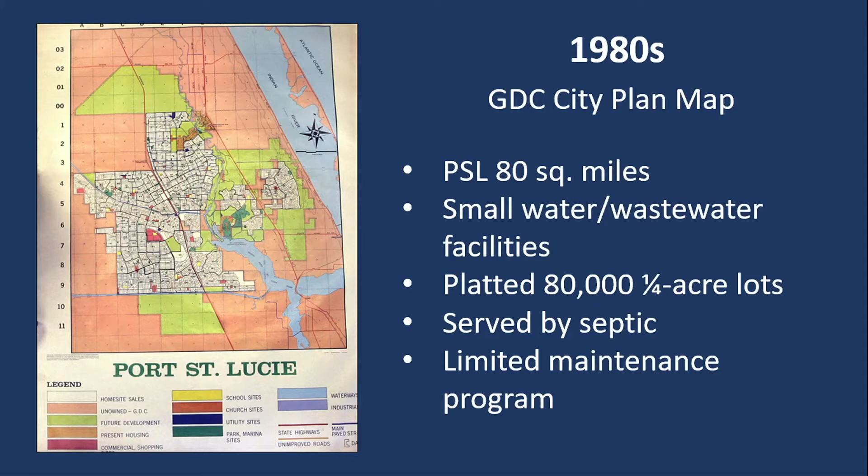So there could be as many as 4 septic systems on 1 acre of property, with a very limited maintenance program. Fast forward to 1990, GDC and GDU filed for bankruptcy. They couldn't handle the growth or the demand. Back to that infrastructure, they would sell a lot, build the house, hook it up to a well and a septic system, only in a couple spots did they actually put infrastructure into the ground.

New developments nowadays put all that infrastructure in first and then build the community on top of it, but GDC didn't really do that. They couldn't handle the demand, so St. Lucie County acquired the utility through the quick take legal process, and wouldn't you know it, they struggled with it as well. In 1992, they ran out of water. On a Sunday, citizens used 1.2 million gallons of water in just 4 hours.

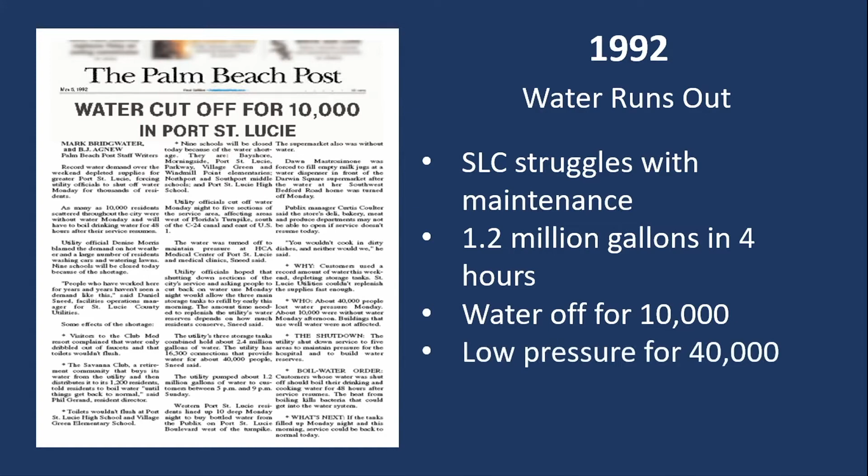That's a tremendous amount of water. On Monday morning, can you imagine waking up? Mondays are bad enough, but then you wake up with no water. 10,000 customers had no water, and 40,000 people had very low pressure. It was a tough go, and it definitely made some headlines that day.

But Port St. Lucie was so excited and determined to expand the infrastructure. When we acquired the utility, we had 17,000 water customers and 10,000 sewer customers. We had seen the difficulties GDC experienced, and the difficulties St. Lucie County experienced, so we wanted to expand that system, particularly all of those septic systems that were taking up so much space. We wanted to really expand that sewer system and get that infrastructure updated.

Fast forward to 2012, doing very well.

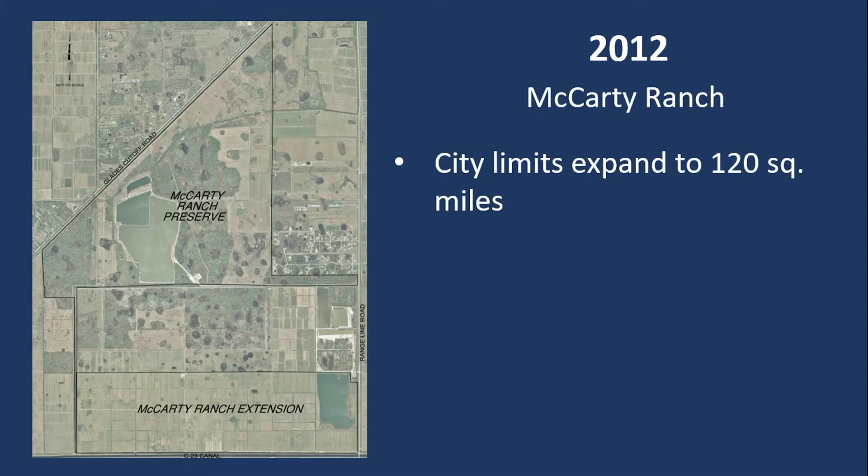The city has expanded from 80 square miles in 1980 to 120 square miles. We purchased this McCarty Ranch property. If anybody's been there, there's a tremendous amount of recreational activities, but the reason we purchased that property, and you'll see on the map, are those large lakes.

This is the site of a proposed future surface water treatment plant. Because our growth has expanded so far out west, we have two water treatment plants currently, but we need to prepare for that growth out west. Even back then, we knew this city's growing, it's expanding. We need to have a third water treatment plant to service those folks out west. So that's what that property was purchased for.

And then down at the bottom, you see we also have McCarty Ranch Extension, and that is the home of our water quality project, and I'll get into that in a couple more slides. But at this point in 2012, a lot of growth there, 71,000 water customers, 52,000 sewer customers.

Our utility is a self-permitting utility. We're only one of 4 in the entire state of Florida that has that. So what that means is we're really a one-stop shop. When businesses, new construction's taking place, you don't have to go to West Palm, to DEP, the Department of Environmental Protection, to get those permits. We can issue them here, right here in Port St. Lucie. So that's really a great honor for us.

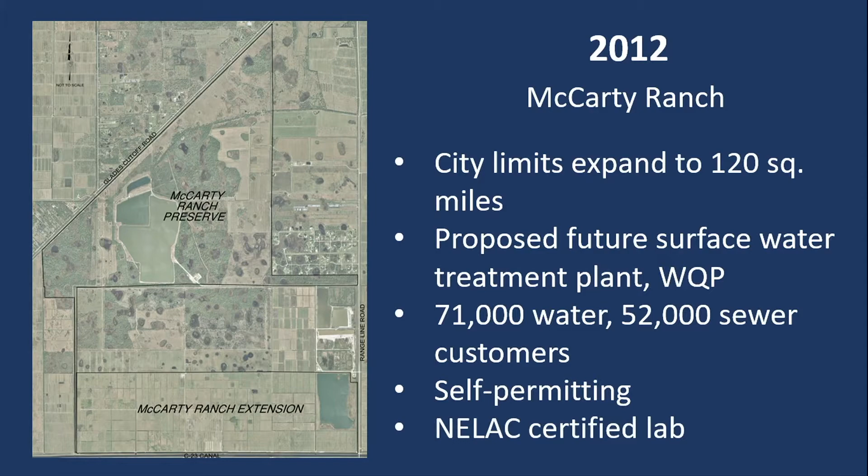We also have a nationally accredited certified lab that's housed in one of our water treatment plants. So that just means we can do a lot of our testing in-house. Nothing really has to be sent out, so that's super efficient.

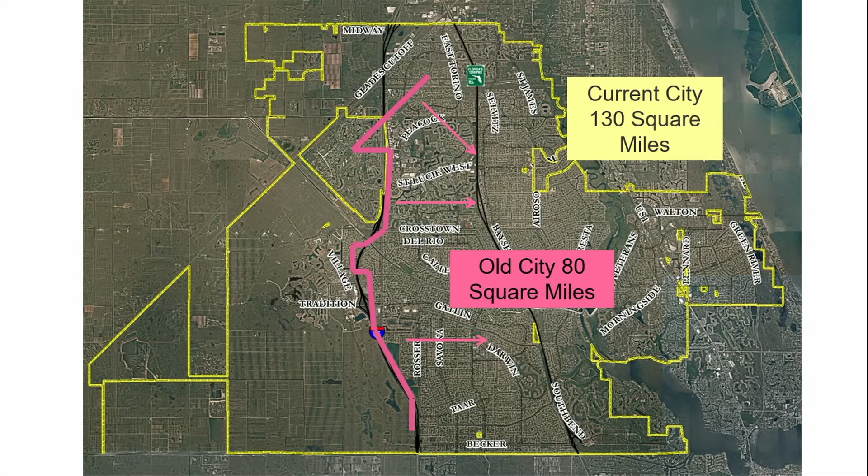So about 9,000 septic systems are out of commission. They're not working anymore. They have failed. Once they fail, you have to hook up to city sewer. And then, all of the new building and new construction that's taken place since then, we've kept 25,000 new septic systems from being in service, right? Because anything new construction-wise, it has to hook up to city sewer.

All right, so we have a tremendous amount of infrastructure, but a lot of it is actually underground, right? So when I first started working for utility systems, I kind of didn't realize. I thought I just turned the faucet on and out the water came. I didn't really give much thought to where it actually came from.

But just to give you an idea of just how much stuff we have, almost 5,800 fire hydrants throughout the city. I mean, you know how important fire hydrants are. We work really closely with the St. Lucie County Fire Department. We maintain all of those hydrants. We exercise them. We make sure that they're working properly because if there is a fire and the fire department rolls up, they want to make sure that they can get water out of that hydrant. So that's a really important part of what we do.

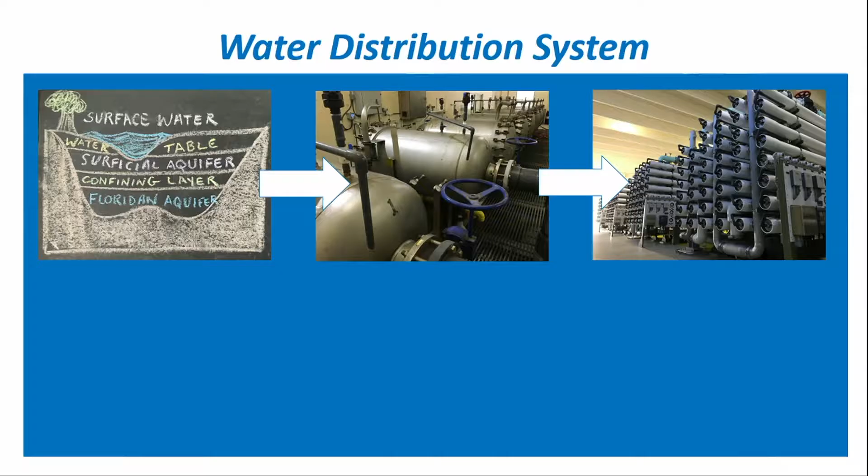Next, when you suck that water up out of the ground, it goes through the different filters. Sometimes there's kind of a sulfur smell, like a rotten egg smell, so it has to go through this next process, which is a degasifier, and that just strips that odor out.

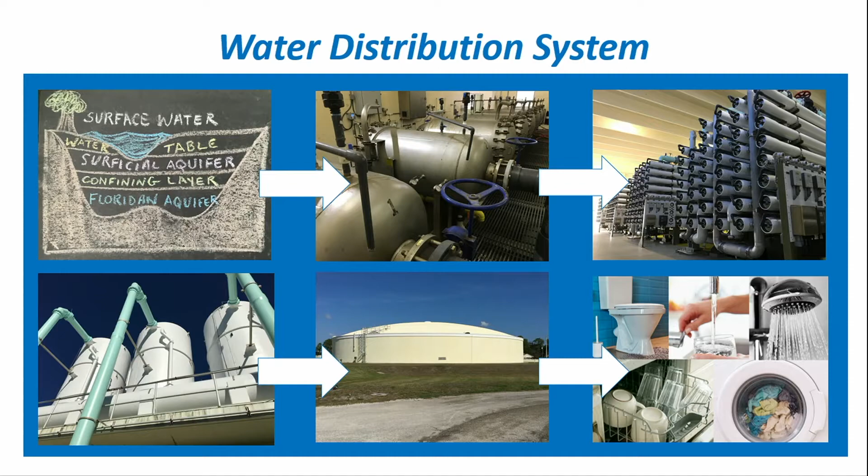And then all of that water is stored. We have storage tanks all over the city of Port St. Lucie. So when you turn your faucet on, that water goes from that storage tank through that 1,200 miles of distribution system, and then it comes to your house. That same treated water that comes out of your faucet is the same treated water that fills up your toilet, washes your clothes, that you shower with, that you wash the dishes with.

All right, so here's that quick video really getting into a deeper look at the water treatment process.

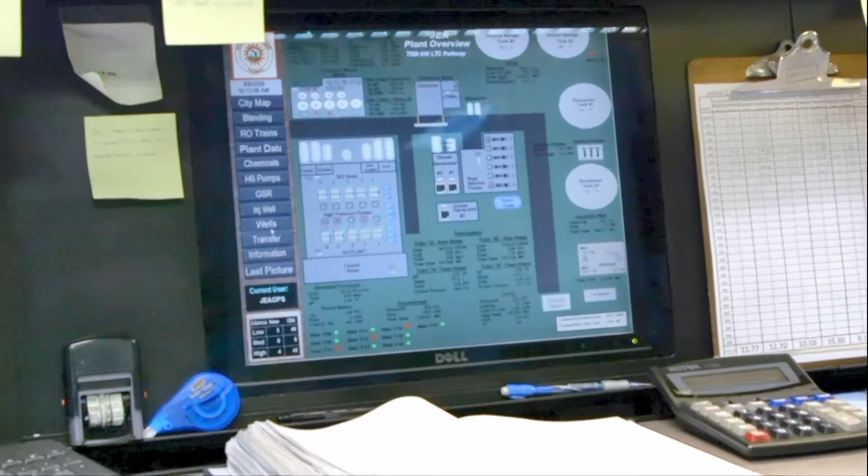Hello everyone, my name is Michael Poveromo, and we're here at the James E. Anderson Water Plant, and right now we're in the control room. Here is our system SCADA. Through these 3 screens we can see everything that's happening in the plant. We control one repump station out at Rangeline, and we can see everything going on remotely there. Everything here, pH, chlorine, pressure, flow, pretty much every little thing you can monitor, we monitor in real time.

Next I'll show you the process area. We have the process area, the blend basin, and some chemical rooms, and I'll take you out there in a little bit.

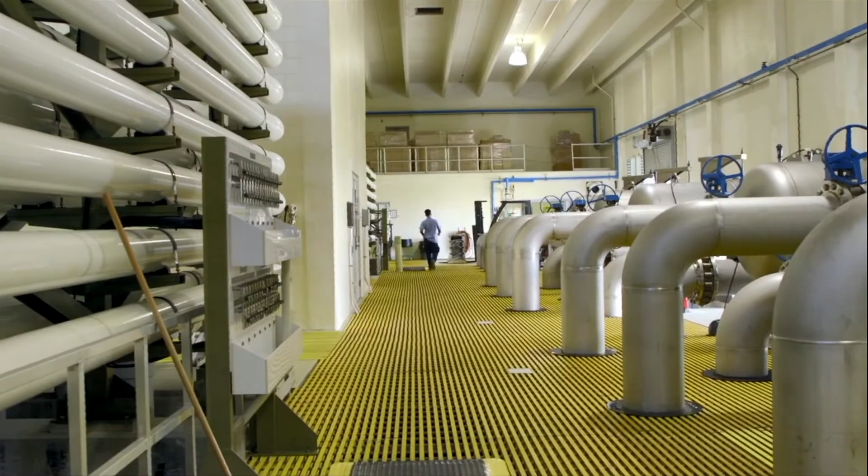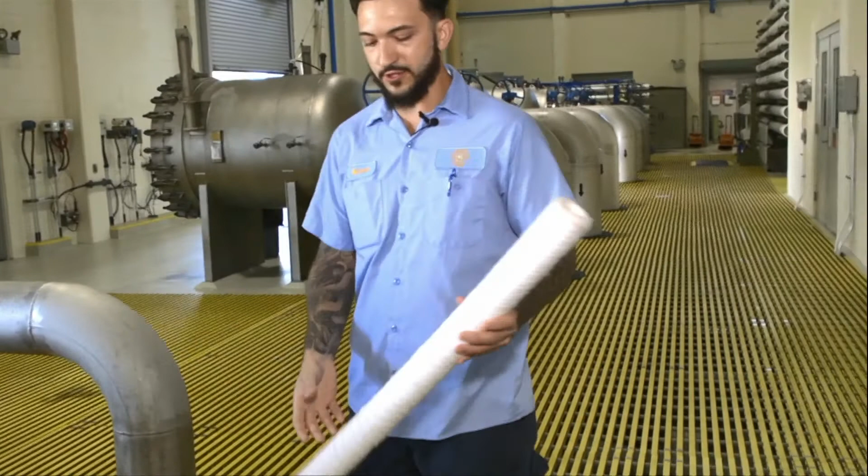Alright, here we are in the process area. Behind me you'll see the micron canisters. Those feed the skids, these are the blend micron canisters. The water coming into the plant, first we put it through the canisters behind me. Inside those canisters are about 200 filters that look like this, made out of yarn. It helps take out the sand and the silt before that water goes into the skids.

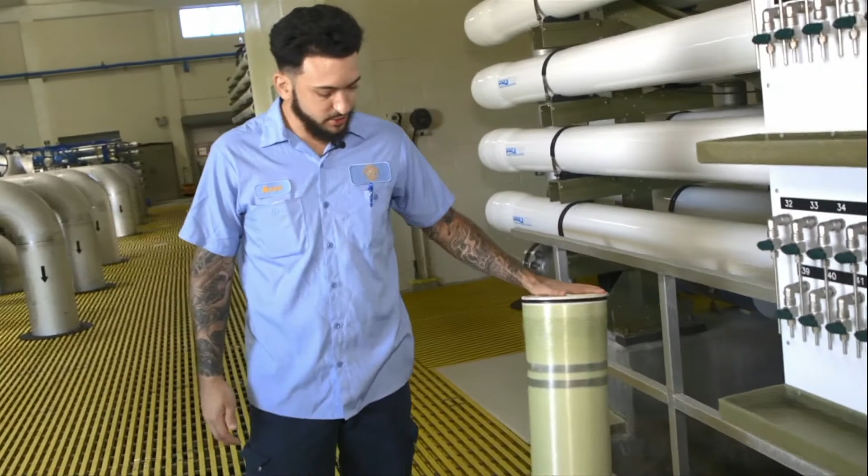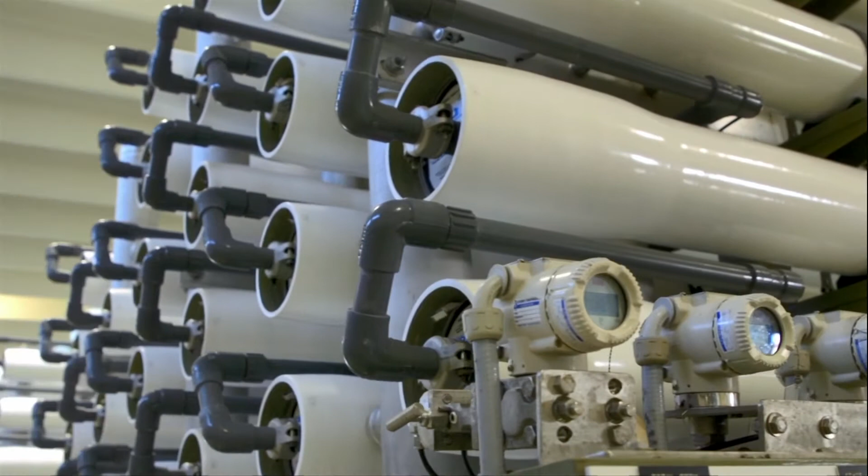We have 10 skids, each produces about 2 million gallons a day. We supply the water into these, we push it through membranes. These membranes are our reverse osmosis membranes. We have to supply a lot of pressure to get the rest of the total dissolved solids out of the water. We can't put raw water straight into these membranes because you'll clog them up pretty quick. So we pre-filter it with those, then it gets put into the skids with this.

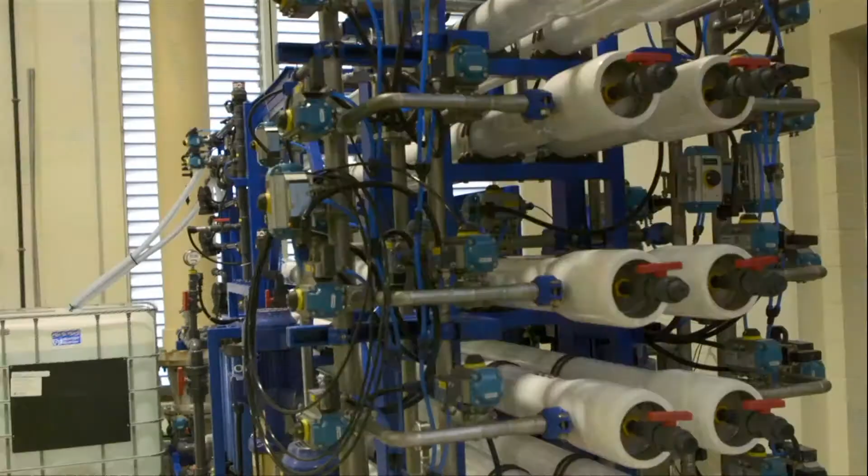Now this removes a lot of the total dissolved solids in the water. It removes so much that we actually have to blend water back into it to add mineral content back into the water, which is what these 3 smaller micron canisters are for.

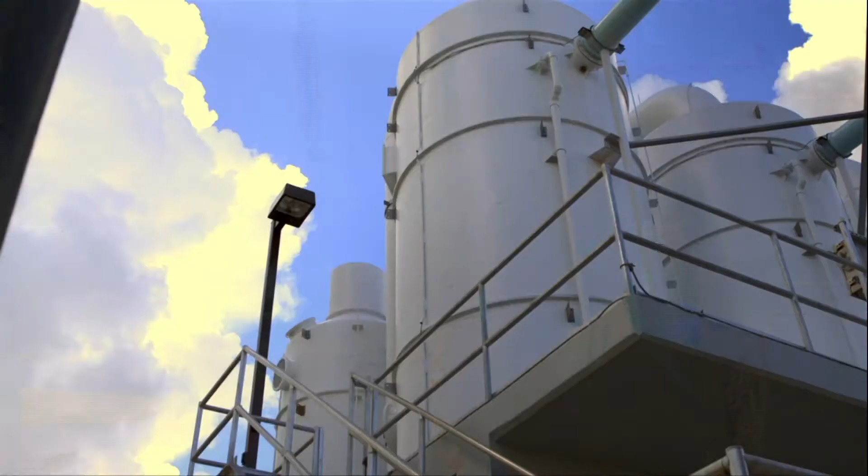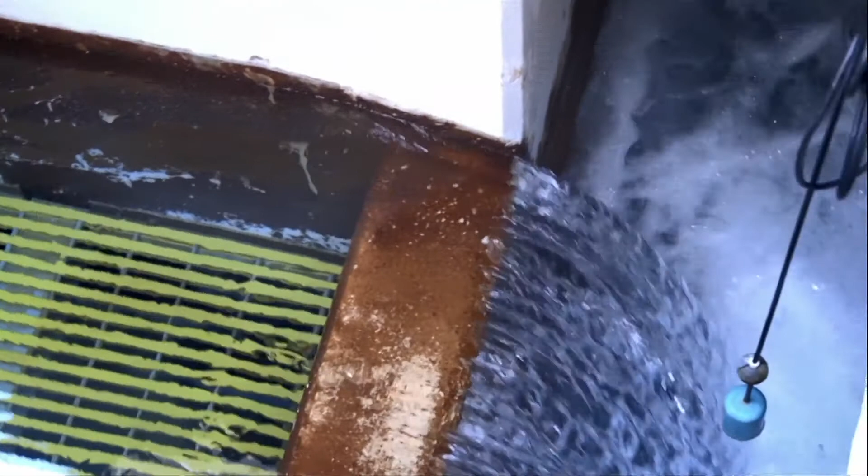Now we're out here by the blend basin, and you can see the stacks behind me. The first row of stacks are degasifiers. What we do is basically have the water falling down into troughs, kind of spread the water around to create more surface area, have the blowers pump air up, and it's air stripping. It'll take the rotten egg smell out, and then after that the water falls down into the blend basin.

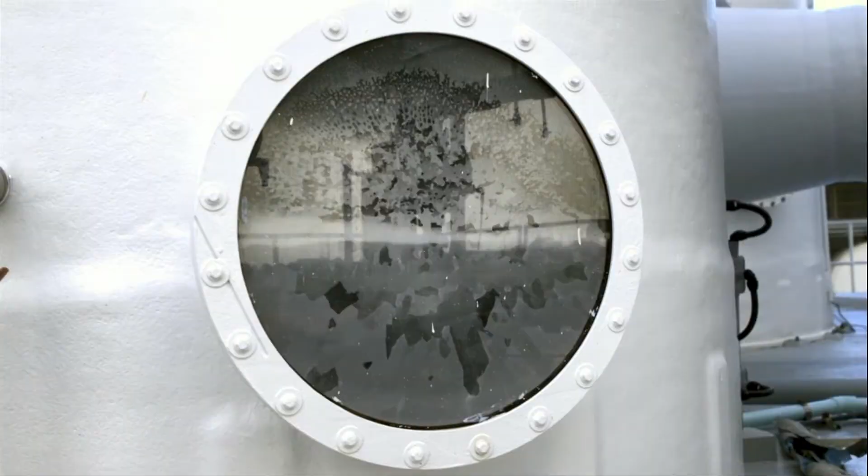It goes through channels. Now we're out by the back of the blend basin. As you can see behind me, the blue pipes are our transfer pumps. After all the chemicals and water have time to mix and disinfect, the transfer pumps will pump out the water into our ground storage tanks. We have 2 ground storage tanks on site, each one is 4 million gallons.

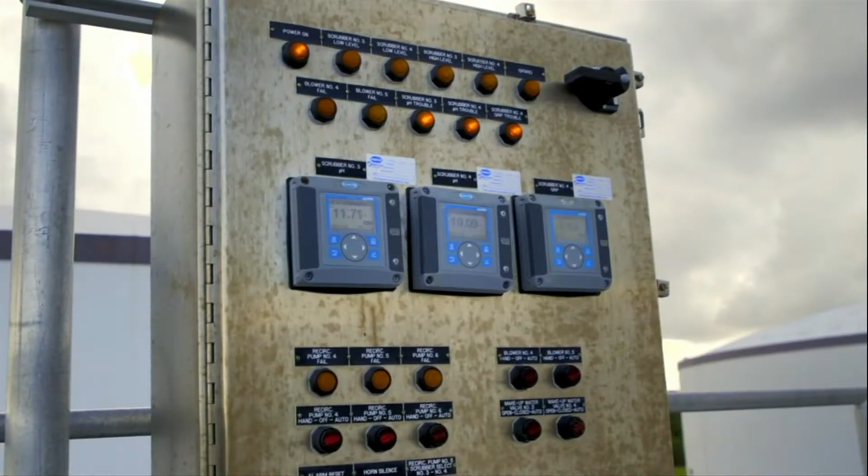As the water is in the storage tanks, just waiting to be pumped out, we use our high service pumps to pump the water out at our point of entry, at which point the water goes into the distribution system for everyone to use.

Behind me you can see the 2 tanks. We have our transfer pumps, and you also get a little sneak peek at the odor control system I was telling you about earlier. You couldn't really see those in front of the degas stacks. Afterwards, I'll show you some of the water quality tests that we run. We want to make sure that the water you get is high quality and within range of the DEP standards that they have us operate by.

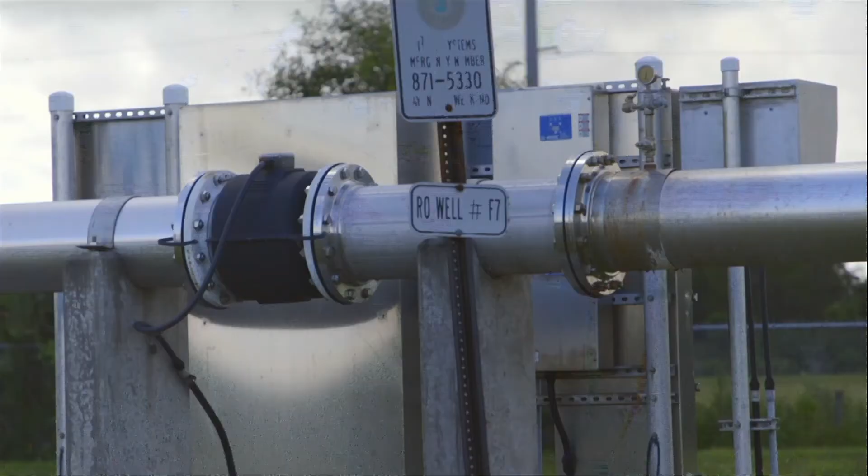Located right behind us is the deep injection well. When you do reverse osmosis, there's only an 80% recovery rate, which means every 10 million gallons we clean, about 2 million gallons of that is concentrate water. That concentrate water gets sent from the skids all the way back to the deep injection well, and it gets sent back down to the aquifer to be cleaned naturally over time.

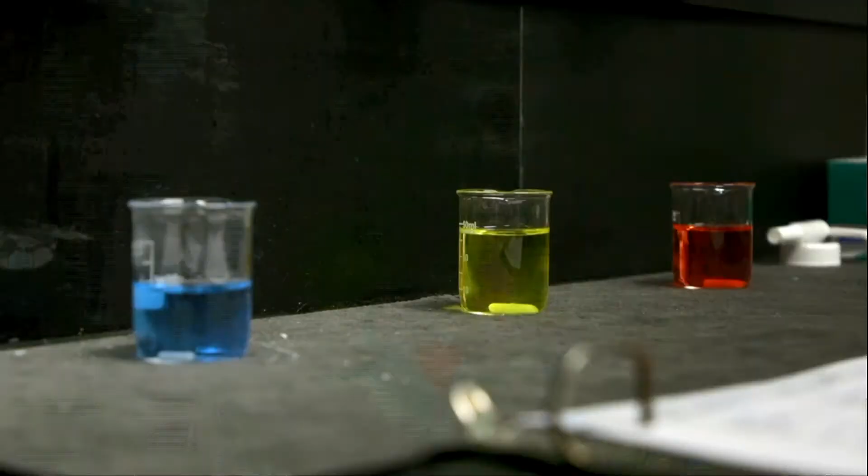Here we are in the lab. This is where we run all of our tests and analysis. We want to make sure that the water we're pumping out is of the highest quality and within range of what DEP requires. We run pH, this probe to my right, and to my left is where we run all the titrations for the chlorine. We run 3 analyses a day to check the pH, chlorine, hardness, and TDS - a general overview of the water we're pumping out, and we keep tabs on it.

We're not only testing the POE water, which is the water going out to the distribution system, but also the water at different stages in the plant. We'll check water going into the skids, make sure the pH is okay, check the blend basin, and make sure the chlorine has the right residual, and all that's done in here. Any more complex testing is done at the lab we have on site.

So that's the basis of the process, of getting the water from the aquifer to your faucet safely and with the best quality that we can provide. Thank you for joining me on the tour, and I hope you enjoy.

All right, yeah, so I'm happy to let the experts go into that detail. Those operators, they live it and they breathe it, so they certainly know far more than I could ever know.

So next, we're gonna do a fun little poll question. We are comparing - not yet, okay, no problem. Well, we're gonna talk about this for a moment.

All right, so we're gonna talk about bottled water versus tap water. I have to confess, I think a lot of people - I've mentioned this before - but I was a bottled water snob when I first moved over to utility systems. I just preferred it, I preferred the taste I guess, I preferred spending more money on bottled water, whatever it was. But then I started working for utility systems, and you go to the plants and meet all the staff and operators who treat this water, and they're so dedicated and so committed.

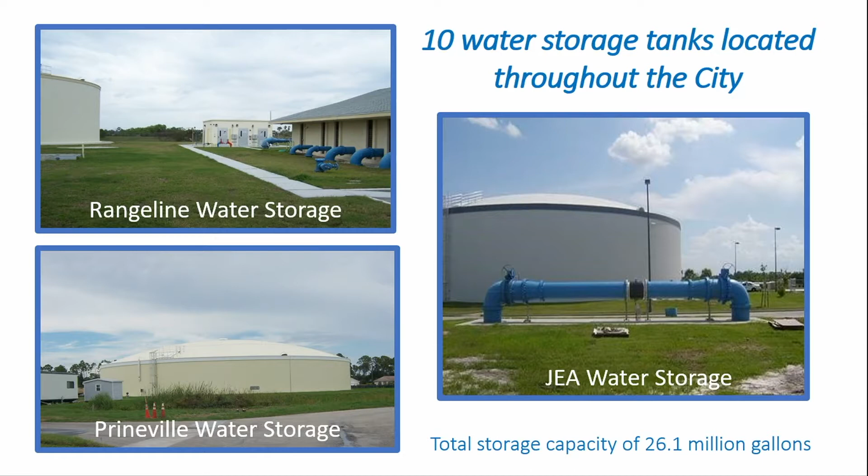So if a hurricane should come and knock on our door, don't go out and buy bottles and bottles of water. You're still going to have water service. We fill up those tanks, so if there's some sort of power failure... now, since I've been here, and for a long time.

We haven't experienced any disruptions in services. During a hurricane, we haven't had to issue any boil water notices. You've still had water coming out of that faucet.

Now, you may not prefer the taste, you may like your bottled water, but instead of fighting the crowds, just tap in, literally, just go to your sink. We're still going to be providing water throughout, okay?

All right, so moving through, I mentioned this in the beginning: McCarty Ranch Preserve, we purchased that property for the site of our future surficial water treatment plant. But down on the southern end of that property, at McCarty Ranch Extension, that's the location of our water quality project.

Now that runs parallel to the C-23 canal. So again, if you've been around Florida for a little while, you know that we have problems. The health of our river has been in jeopardy a number of times because of algal blooms.

So what happens is the delicate balance gets thrown off. There's too much excess fresh water, too much nitrogen, too much phosphorus, and that just throws off the balance. And then these algae blooms bloom.

So what this water quality project does is, when the C-23 canal reaches a certain level, particularly in the rainy season, we can pump that water out and store it. You see the numbers there.

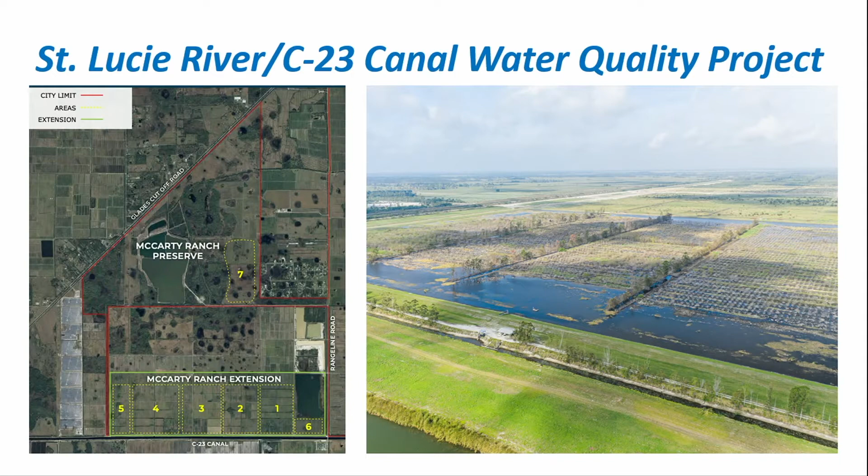So we've already been able to store something like 80 million gallons of water. It's incredible. We've had a particularly rainy season, with a couple horrific rain events that have dumped a lot of rain.

But this also holds water from the property. So any rainfall that falls on the property gets stored in these different areas.

So that's a really cool project. We really are true environmentalists here in the Utility System. So anything that we can do to help protect that river, we are going to do it.

All right, so that's the clean part. Now we have to get into the dirty stuff - we have to get into the sewer side of things.

So I have another poll question, Avi, and the question was: do you know what kind of sewer system you have at your home? So it's one of three - you either have a septic system, a grinder, or you're on a gravity system.

Just want to see if you all out there know and can identify what kind of a system you're on.

Oh, okay, yes, thank you. Okay, sorry, I was having a little conversation with Alex.

So we'll just give you a few seconds to answer and tell me what kind of system you're on. We're going to talk about each one, but it helps me to know what kind of system everybody has.

Some people don't know, and that's okay. Hopefully we can educate you. If you're unsure, I can give you some clues as to which one you may be on. So, do you have some answers for me?

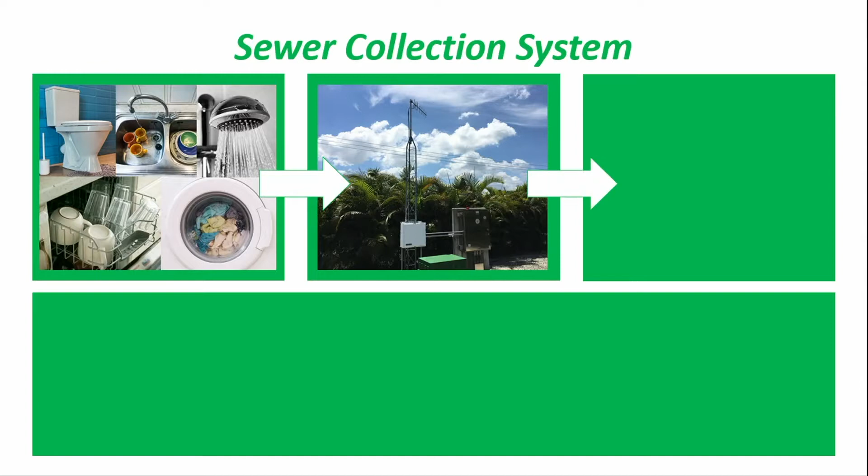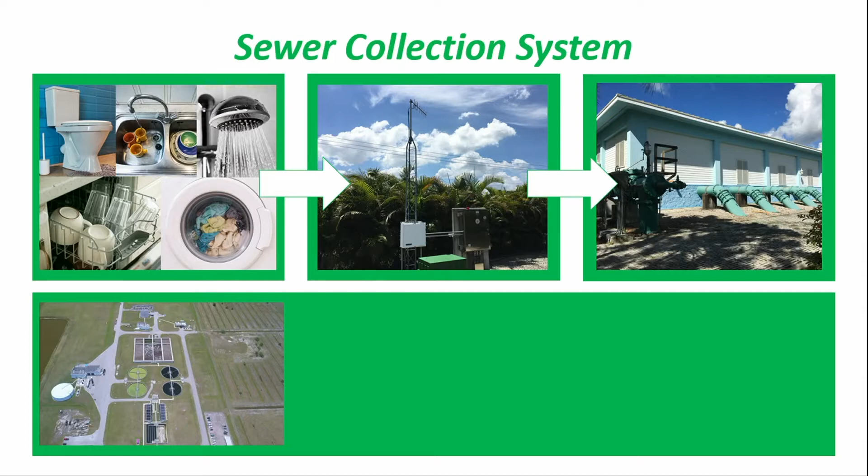So as it moves further down the line, it gets one last boost from a booster pumping station. That's a picture of our Glades booster pumping station, just to give it that last push to one of those 2 wastewater treatment plants. And that's an aerial of our Glades wastewater treatment plant, located on Glades Cutoff Road. I'm going to show you a video here in a moment that goes into more detail about what that plant does step by step.

As the wastewater enters the plant, it enters through what's called the headworks. Think about your body, it starts up here and then works its way down. So at the headworks, that is where the trash that's flushed is separated out.

People flush amazing things. It's crazy what comes in there, but people are flushing diapers, feminine hygiene products, socks, towels, flannel shirts. I don't know how they make it this far. But anyway, at that point, all of that garbage is sifted out, and guess where it's taken? To the landfill. So you can really cut out that middle step and help us out by not flushing your trash. Your toilet is separate from your trash can. Keep those things separate.

So once all the trash is sifted out, it makes its way down into that area in the foreground of that picture, and it kind of reminds me, I'm sorry to ruin this movie for you, but it kind of reminds me of Willy Wonka and the Chocolate Factory, right? You've got that chocolate river coming through, and that's where all those microorganisms live. That's my favorite part, I just find it so fascinating.

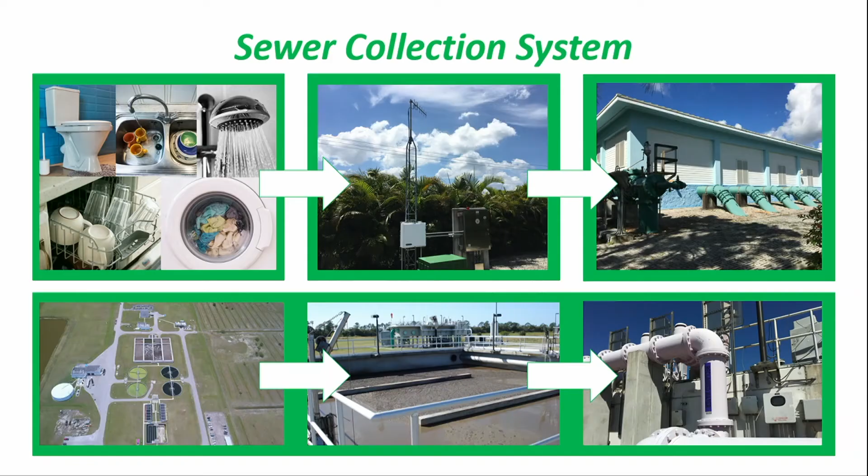We need them to keep it healthy, to keep our treatment process running more smoothly, if you will, and our operator in the video will talk more about that. The solids get separated out, and the solids actually go to a composting facility. So really, as much as we call it wastewater, nothing is wasted, which is really cool. The solids get separated out, and then at the end of the chocolate river, it's no longer chocolate, it's clear, crystal clear, and that water is highly treated, highly disinfected, and it's sent to several customers who use it to water their community green spaces and their golf courses.

So it's called reclaimed or reuse water, highly treated, highly disinfected wastewater. We're not drinking that water, right? It's two different processes, but that is used for irrigation purposes. And then whatever those customers don't use for irrigation, that treated wastewater gets pumped deep, deep, deep down below the superficial aquifer, below the Floridan aquifer, into a deep injection well where it can re-enter the earth, if you will, and then through artesian pressure kind of make its way back up, which is just, again, so fascinating to me. You really appreciate, when you flush something and it just goes away.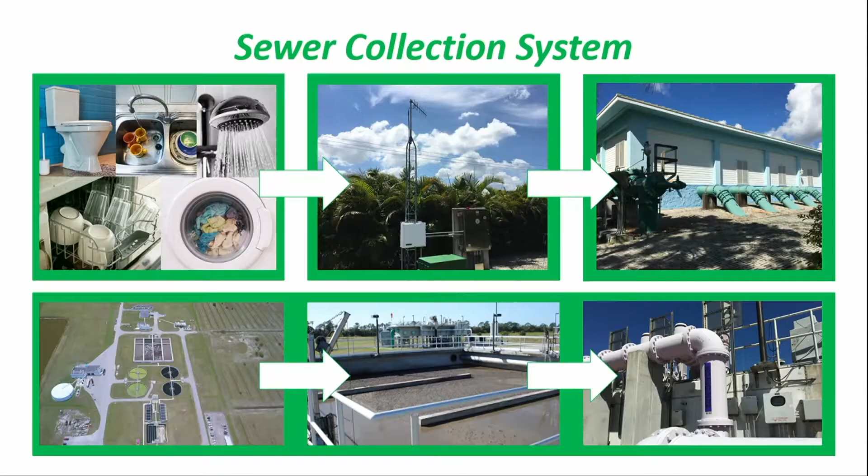Well, here's where it goes. All right, so here's a quick video about just a deeper look into the wastewater treatment process.

Welcome to the Glades Wastewater Treatment Facility, where we treat about half of what the city produces for wastewater. Everything starts out in the field, though.

Here you can see the overview of the entire city. From here, we keep track of the individual lift stations themselves. We have every lift station in the city on this monitor, and we make sure everything's working to send the water to us.

From the lift stations, it comes over here to the wastewater booster pump stations. There are 3 of those in the city: Northport Booster Station on the north side, Southport Booster Station out towards Club Med, and the Glades Booster Station out towards Tradition.

We monitor everything 24 hours a day, 365 days a year. Here we have our SCADA computers. SCADA stands for Supervisory Control and Data Acquisition. With these computers, we keep track of all the flows, pressures, pumps, anything that can be measured, we measure it and keep track of it.

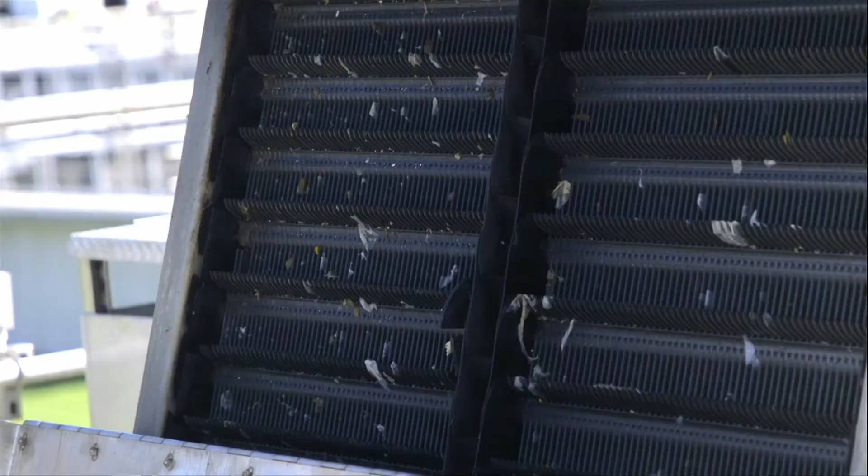As the flow comes up into the headworks, the first place it goes is the bar screen. This is where we want to remove anything that's not living, anything inorganic. All the flow goes through these teeth and racks, and we catch it there so that only something small makes it through, catching it in the back of the machine.

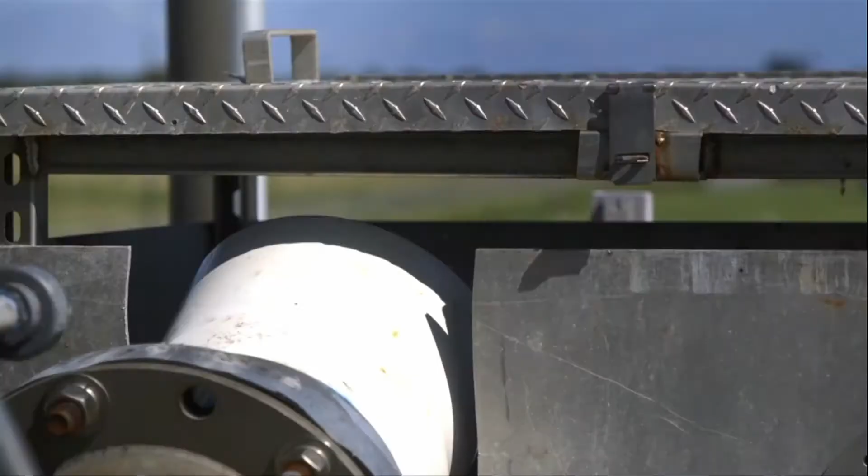As it comes down, we're squeezing all the water out of it. It compacts and squeezes the water out, then falls down a little chute into a big dumpster, which we'll show you as we go through there.

Now that we've moved through the headworks and removed the garbage, removed the sand, and taken out all the things that the animals that treat the water wouldn't normally treat, the process comes to here.

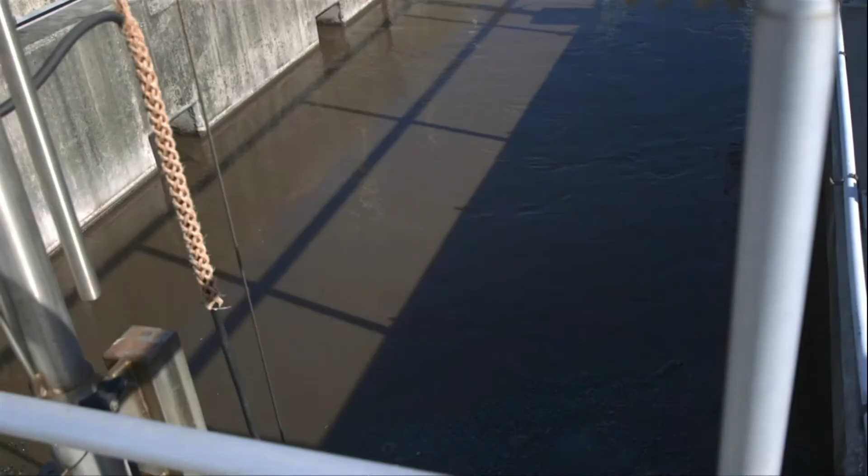This is what we call the anoxic selector basin, and it starts here in the front. These are continuations of that anoxic process, where there are lesser amounts of oxygen, so the animals keep breaking the process down using the chemicals in the water. We keep track of the health of the bacteria and the animals in the water so that they can keep doing what they've got to do.

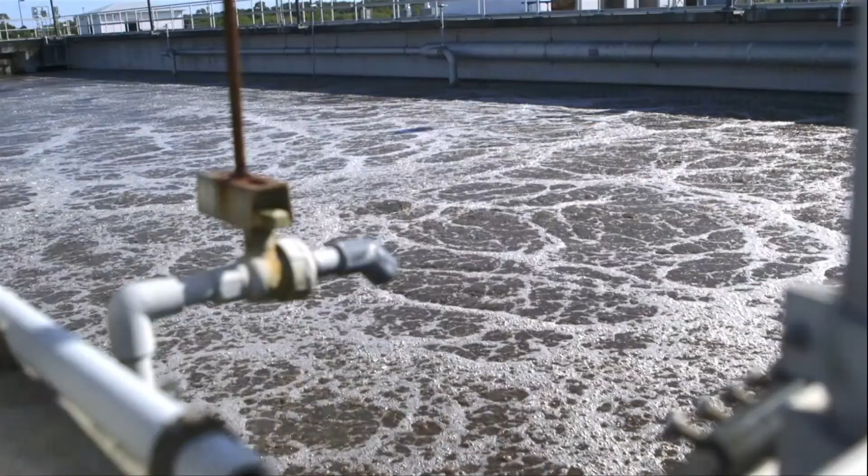These are called the aerators. In the aerator, that's a different part of the process, where the animals are able to use the oxygen-rich environment to break down further parts of the waste stream. All that air does 2 things for us: we get mixing from the air as it comes up through the process, and the animals get all the oxygen they need to further break down the waste.

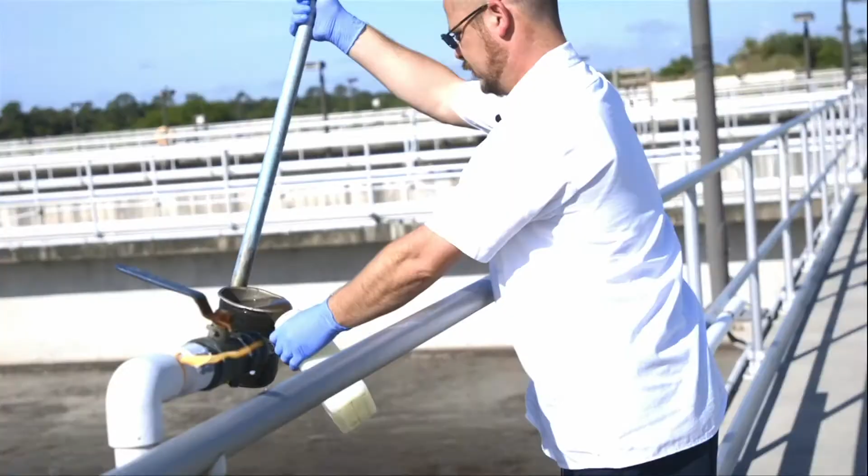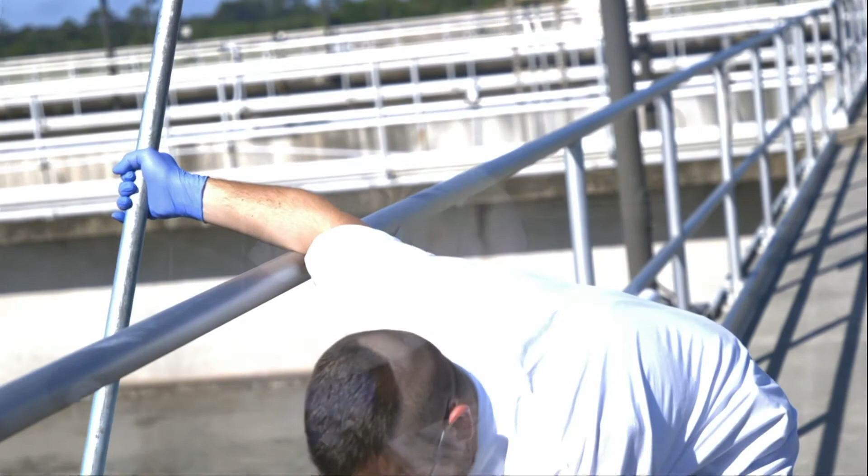In each part of the process, we take samples every day. The different tests we run on the samples tell us different things about the health of the animals in the water and the health of the overall process itself. There's no fancy way to take a sample—the same way everybody's been taking samples for the last 40 years. And there's our sample. I'm just going to rinse this off.

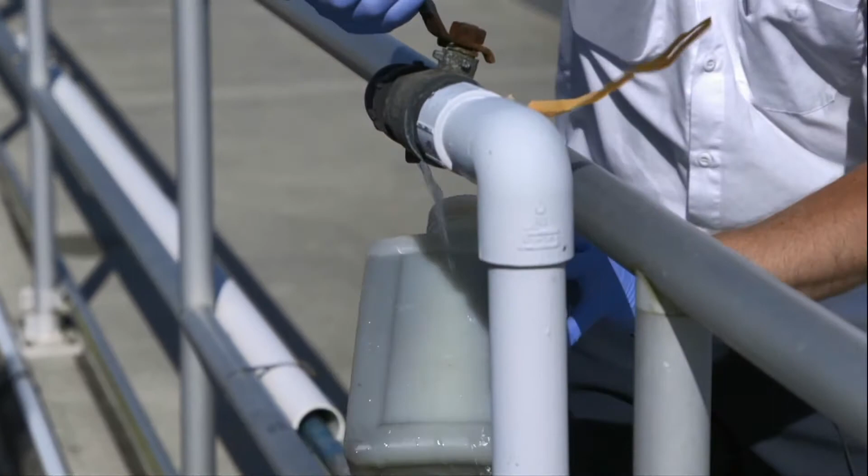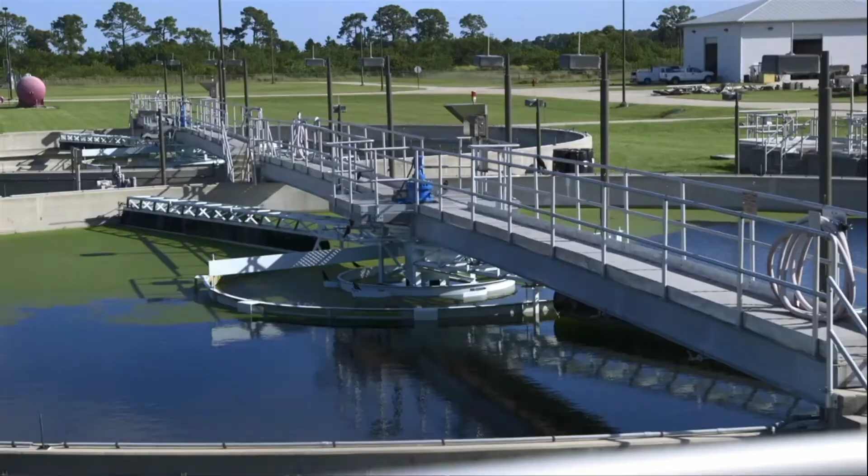Now that we've finished with the aeration part of the process, we're moving into the clarifiers. Right now we're using 2 clarifiers because that's how much process flow we've got coming in from the rest of the city. The mixed liquor goes into those clarifiers and settles out, so that only the clean stuff on top keeps going, and the solids get recirculated back to the front of the process. All of the clear liquid, all the clean water, stays on top, comes over the weirs, and moves on down the process.

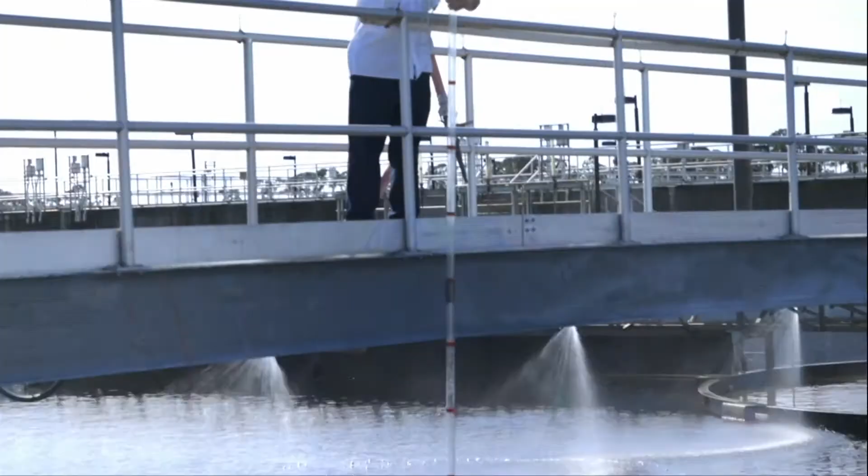Throughout the day, we take what we call a blanket reading. This is what we call a sludge judge, and what we do is we take it down.

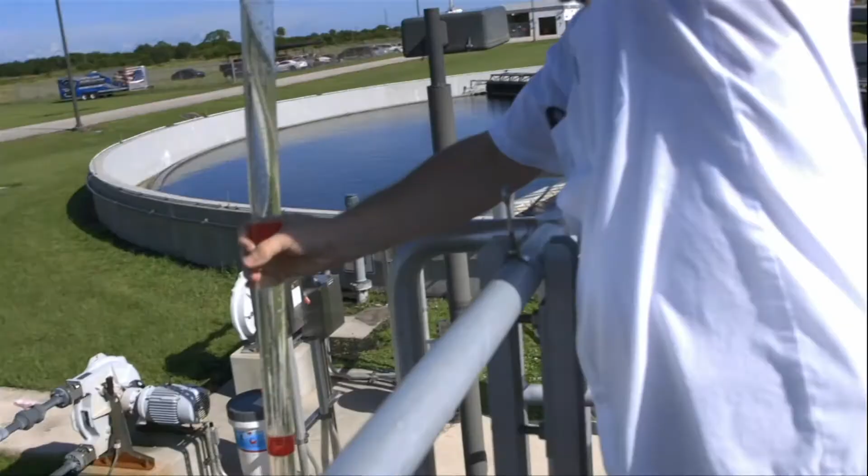Now you can see how clean the water is all the way down until the very bottom. So even though we've got all that water in there, there was only a foot of sludge at the bottom.

One of the things we're doing here is removing more of the actual inorganic particles that weren't removed in the clarifier. Anything that didn't settle down stayed suspended in the liquid, and these are what we call sand filters. The way it works is the water comes up through the sand, which catches anything left in the water. When we make it through this process, we want the absolute least amount of anything floating in the water. And everything left over, that's as good as it gets here. It comes out over the weir, and you can see how clean that is.

So this is the chlorine contact chamber. What happens here is as the water comes through the sand filter, it's got the least amount of particles that we can get it to.

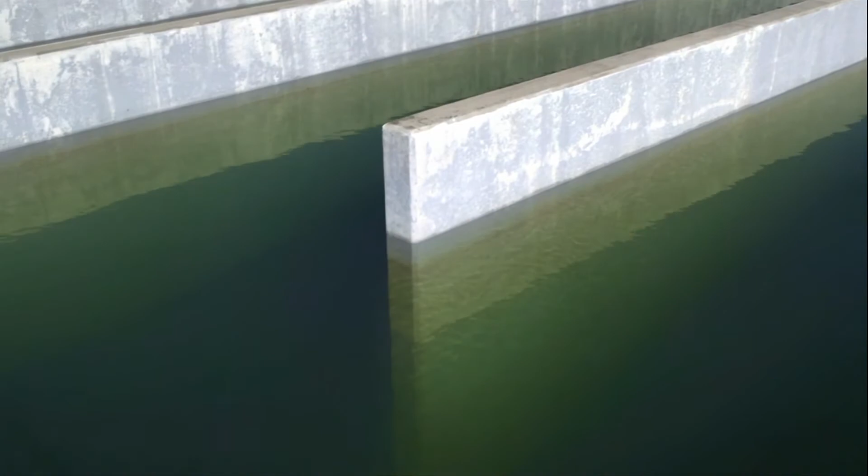So what we do here is inject it with chlorine. Now it's not quite the same as household bleach, but it's pretty close. It comes up here at the start of the chlorine contact chamber and travels along the pathway the engineers have devised. The reason we have that long winding pathway is so we can have 30 minutes of contact time. That contact time between the disinfectant and the bacteria and viruses left in that water or on that surface is what allows it to break down the outside of the organism and kill it. If you don't have that contact time, you're not properly disinfecting.

We monitor the levels of everything, and anything that doesn't meet that high standard, we try to recirculate it back to the front of the plant. Anything that's still good, but not quite as good as it has to be, will get sent down the deep injection well.

When the flow gets sent down the deep injection well, it doesn't look like much on the surface. It's just a pipe, but it has a casing around it, and at the bottom we've perforated the casing to where we want it to go, according to whatever the geologists tell us is the safe spot. We continually monitor everything, so if we see anything out of whack, we immediately bring the geologist out to make sure everything is good.

So anything that doesn't go down the deep injection well, we send out with the same pumps. We just change a couple valves, reroute it, and then it goes right out to those holding ponds.

On this part of the process, we've removed a small percentage of the solids. They're also condensed, and we squeeze a little more water out of them and put them into a trailer. That trailer takes the leftover solids from the process and sends them out to a composting facility. One of the simplest tests we run is a settle test.

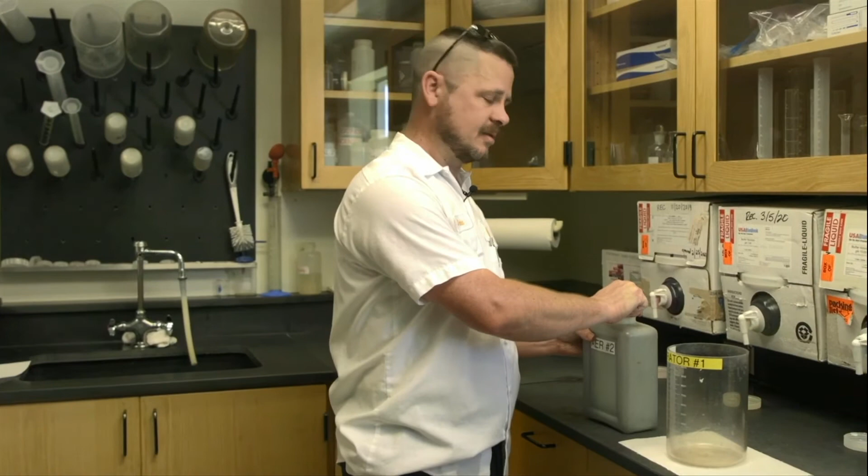Earlier we took a sample from the end of the aerator, because that's the final spot most of the solids are in before we want them to separate for the rest of the process. So one thing we want to know regularly is how quickly that happens, and whether it happens well.

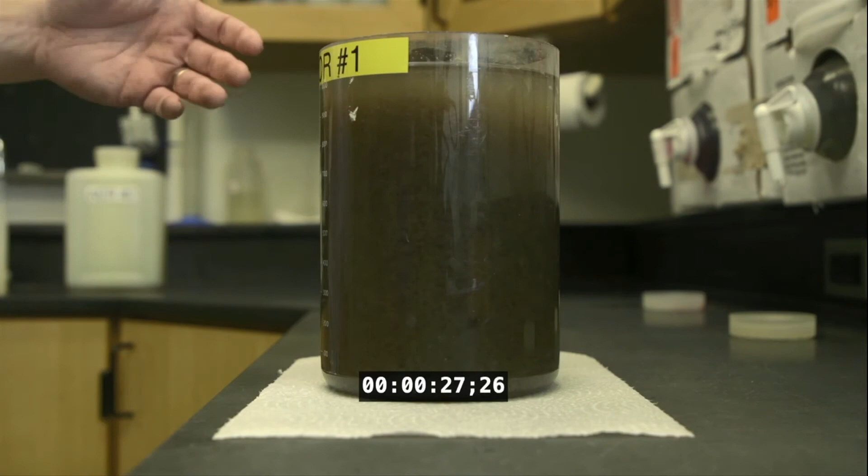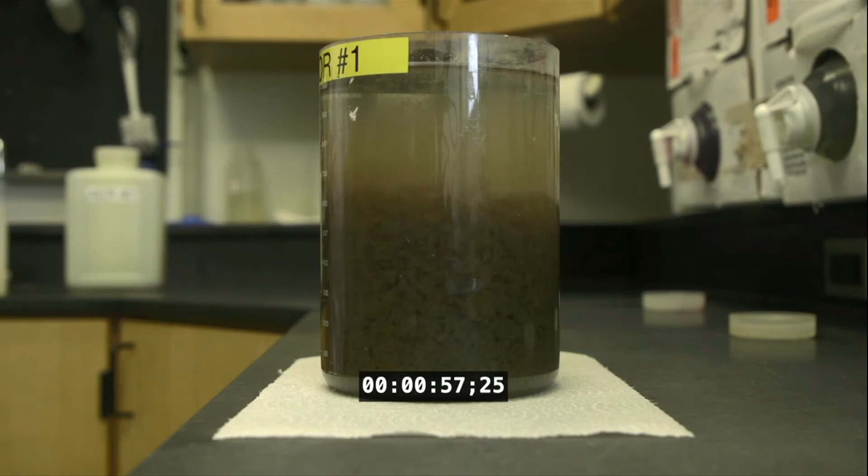So we take the sample, mix it up, and pour it into the settleometer. You can see how quickly the particles separate the clean water from the mixed liquor. As time goes on, this will begin to settle and compact, and the measurement of where it gets to in 30 minutes gives us a really good indication of how well our process is working.

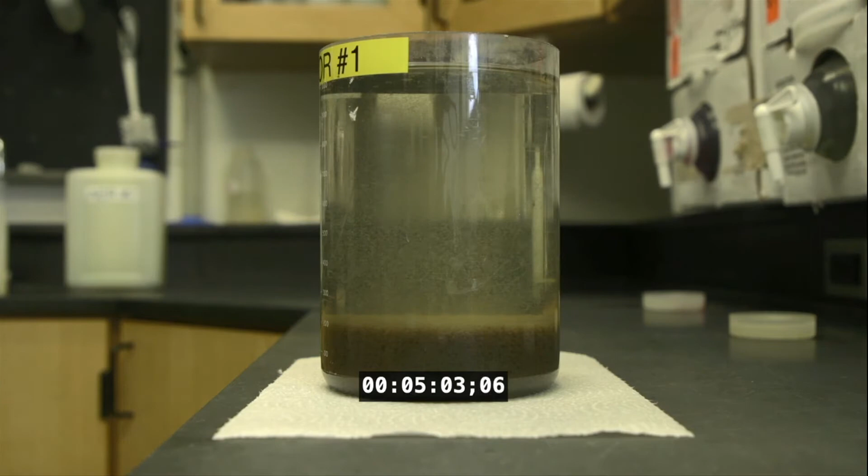You can already see it begin to compact as it moves down. What ends up on the bottom of this settleometer is the same as when we took that blanket sample out at the clarifier. The settled solids at the bottom get pumped back to the front of the plant to keep doing the work, and that clean water moves on to the sand filter to get further cleaned, then to the contact chamber and so forth. That's the entire process in a little microcosm there.

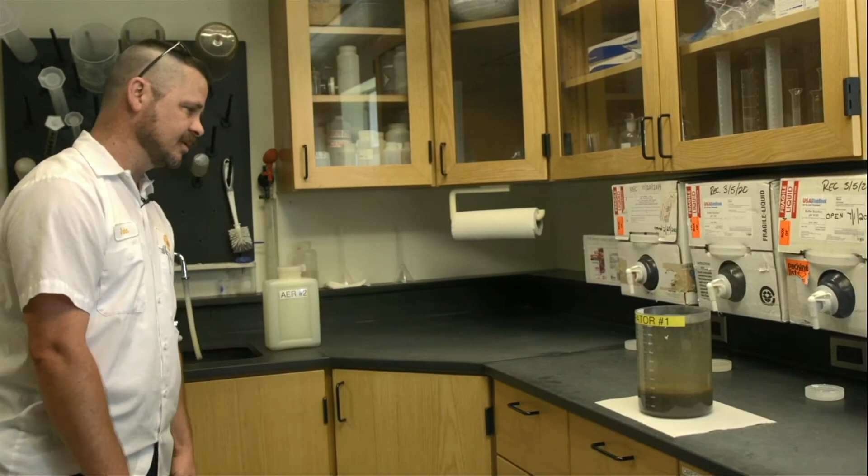Hopefully I've explained in a relatively simplistic and easy to understand way how we take the dirty water and turn it into clean, reusable, recycled water by removing all the inorganics, keeping the organics, and disinfecting the bacteria and viruses at the very end, so that everything is safe and healthy and reusable.

So there we go. That was John Lamb, our chief operator at Glades. I mean, you can smell that video, can't you? I can smell it. It's a very particular smell, and on a windy day, it's worse.

But again, it's so fascinating to me, and I've just learned so much. But remember, we had asked that question, what kind of system are you on? Most of you answered with a grinder system. So I just want to go through real quickly. There are 3 different kinds of sewer systems here in the city of Port St. Lucie. This first picture here, this is a septic system.

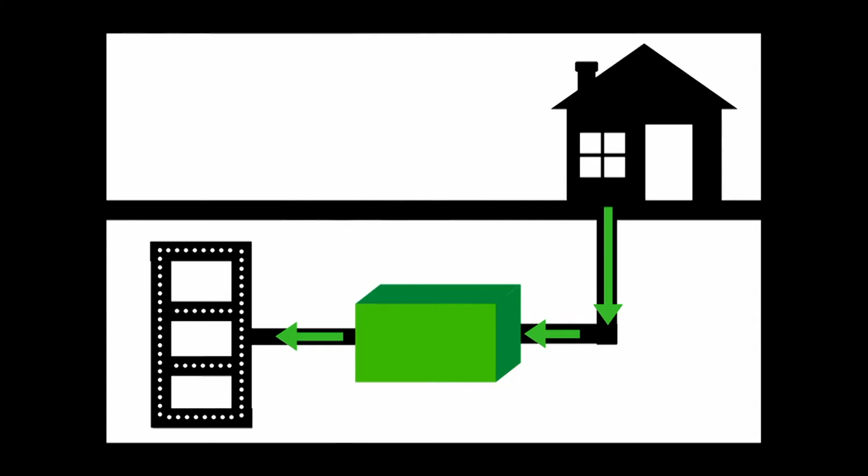Just FYI, if you do have a septic system, if you lose power for whatever reason, your septic system is still going to work. Any wastewater that leaves your home enters this tank that's underground, and it displaces what's in there and pushes it out into a drain field. The solids sink to the bottom of the tank, the grease and stuff from the kitchen sink kind of floats on top. And for those of you who have septic systems, I find that you take the best care of them because you know they require care.

You can't flush those things I mentioned before, like socks and diapers and different things. You have to take really good care of it because you want to extend the life of that septic system. Now, if that septic system should fail, particularly if you live close to a waterway, there is the potential that wastewater could leach into the groundwater or into the waterway. Again, I'm not telling you guys anything you don't know. Septic system owners I feel like are so good about it, because you want to extend the life.

So there was a question that came up that Alex mentioned to me. Somebody wanted to know the cost of converting. So if your septic system fails, or even if it hasn't failed and you just want to be proactive and hook up to city sewer, it's just under $6,000 to connect, but you don't have to pay it all at once. We have a 10-year interest-free program, and about $42 gets tacked onto your bill each month, and you have 10 years to pay it off. But there's grant funding available, so if you give us a call, we can help you better navigate if you're looking to switch over.

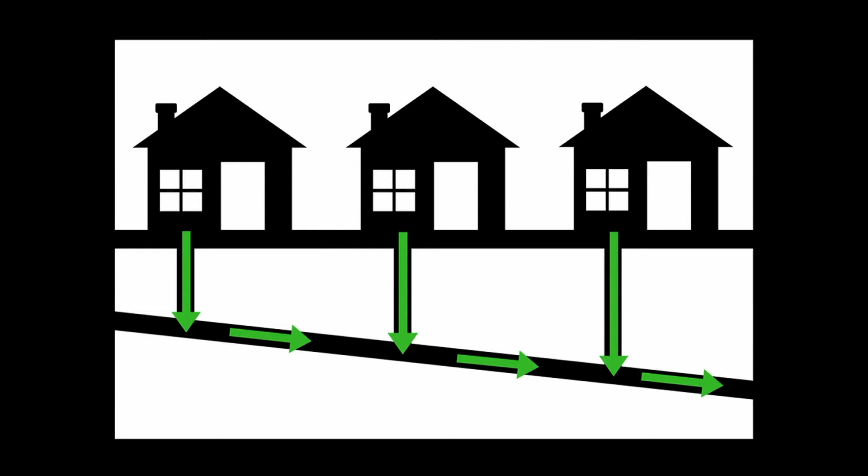So the other option would be a gravity system. A gravity system is much more disruptive. You have to dig deep into the ground to make sure those mains are on an angle, because gravity is just used to push the wastewater down the line. So it's not just tearing up your lawn, it's going to be upending the driveway and the sidewalk and the roadway. It's very disruptive and very costly. That's why we went with this option, the grinder. So I'm going to take you into the grinder with me here and explain the parts and pieces.

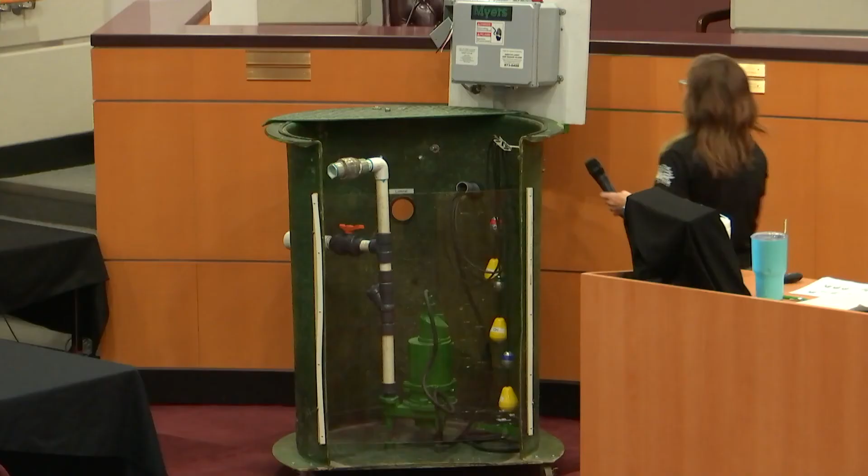Okay, so here we have our grinder display, and just so you know, this is a cutout. It doesn't go into the ground with this big hole in it, just to clarify.

All right, so here's our grinder system. All of the wastewater that leaves your home enters into this tank. It's about 250 gallons. There's a float system in here, so once the level in the tank reaches a certain level, that will activate the pump, which is this green thing down here. That pump's about, I'd pick it up for you, but I'm not that strong.

The pump is about 90 pounds, and below the pump are blades, like a blender or grinder, right? And that's why it's called a grinder, because it grinds up the solids.

Now imagine if you're flushing towels and diapers and things, those things are going to get wound around those blades, and what's going to happen is now the water can't be sucked up and sent out into the sewer system. This tank is just going to continue to fill and fill and fill. If you take a long shower, if you're doing laundry, this tank will just fill, and then once it reaches a certain level, then that's going to sound the alarm.

Now we have reached the danger zone. Many of you have probably heard that alarm go off, and usually it's at the worst time ever, but then that is your signal that you have to call us because something is happening in here.

So you go out to the side of your house. This is your electrical panel, and just FYI, you may not know this, but once that alarm sounds, the red light will go off. You can actually silence the alarm. On the other side here, there's a sensor. If you just wave your hand in front of it, that'll silence the alarm.

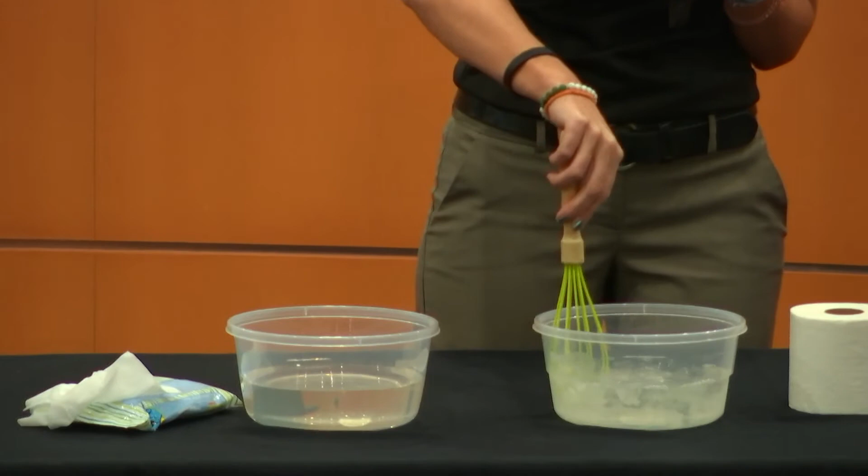Okay, all right, so moving to the next one. Here I have wipes. Now, not to knock all wipes, because this one there is a picture and it says do not flush, so thank you, whatever brand you are. But I'm going to show you what happens. Oh, we got 2. All right, I'm going to put a wipe in here, and we're going to whisk that around.

Whisking, whisking, whisking. It's like an infomercial, right? Like Vanna White up here. Okay, all right, so I am really giving it a go here.

Okay, now I'm going to show you a magic trick. You ready? Okay, magic words, alakazam. Look at that. That wipe is completely intact. You can see the corners. It did not break down, it did not fall apart, and it's not going to, not anytime soon, I guarantee you.

But again, most of the issues that we have when that grinder is sounding the alarm, it's these. These are horrific. It's like they gang up on you, and they're magnets, they hook together, and then they tear up your grinder, they tear up everything. And those septic system owners out there, you know that these do not go in. You guys don't flush these, you guys are so good about it. But our other friends, we need to make sure we're keeping wipes out of the sewer system, because wipes clog pipes. If you remember one thing from me today, please let it be that.

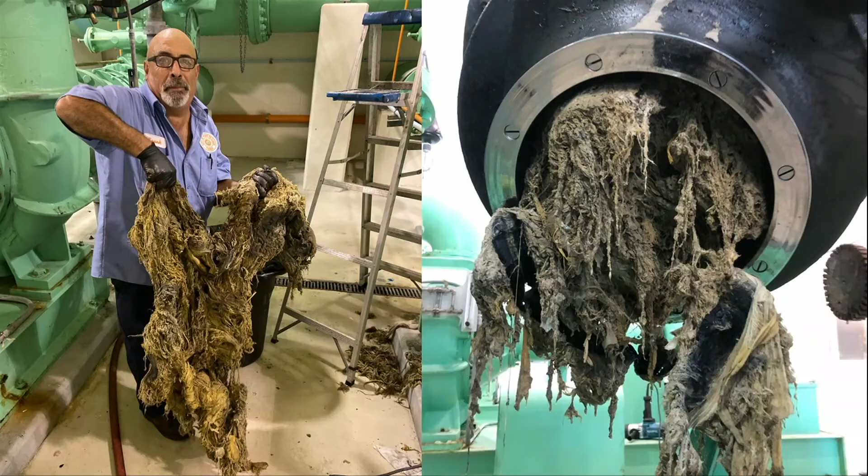Okay, so we've done our little flush test. And it wouldn't be a Utility Systems presentation without some really gross photos.

So this is my friend Frank. This is at the Glades Booster Pump Station. This is a tremendous amount, we call them rags because it's just all kind of feminine hygiene products, whatever else that gets flushed. This is just a huge clump, mostly of wipes, that somehow made their way through the sewer system, made their way through lift stations, and hit one of our booster pump stations. My man Frank there, he has to manually remove them and pull them out. It looks like he's holding a giant sloth, but he had to pull all of those out so this pumping station can continue to do its job. This happens more often than Frank cares for, but it happens a lot. So please, you guys, please think of Frank and don't flush any wipes.

All right, so now we're going to get into FOG. We think a lot about wastewater coming from the bathroom, but there's actually a tremendous amount of wastewater coming from the kitchen. Things like bacon, poor bacon always gets blamed for everything, but when you fry up bacon you have that grease in the pan, right? So some people actually save the grease, they use it for future cooking projects. Some people dump it down the sink, and some people trash it. Again, I'm begging you, keep it out of our sewer system. Do not put it down the sink.

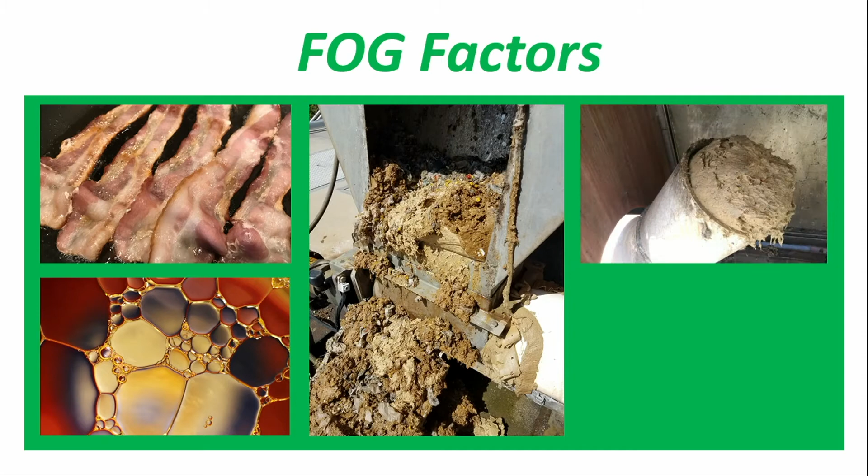So more grossness, I love it. I hope nobody's eating dinner. This is what fog looks like when it enters the wastewater treatment plant. It's about the texture of peanut butter, but far less pleasant. So again, there's my friends, Bruce and Katie. They have to manually, with gloved hands, pull a lot of this out. Remember, wastewater gets highly disinfected and highly treated so we can use it for irrigation purposes. When there's this amount of fog, fats, oil, and grease coming through, we can't make reuse.

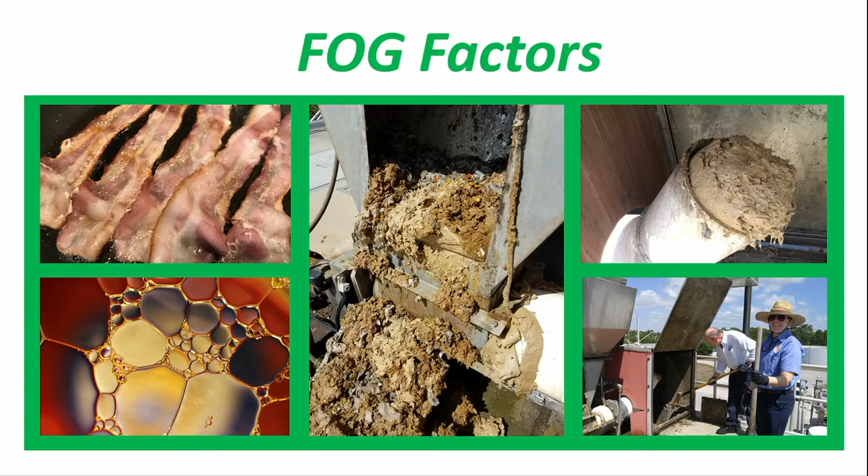We can't treat it enough. You can only get so much of the fog out, and we have to have more wastewater coming through to kind of flush that fog out. So unfortunately, those customers who we provide reuse water for, we have to give them our treated drinking water instead, and that's not a good use of our resources. So again, keep the trash out of the sewer system, and keep the fog—the fats, oil, and grease—out of the sewer system too. All right, I've grossed you guys out enough.

Thank you so much, Jenny. Yes, absolutely, it's always super informative. We appreciate it. So there were a number of questions about a similar topic.

I'm just going to paraphrase and combine them into one. A lot of people are asking why in different locations or different homes the water can look or smell or taste different, and why it can also cause different reactions on silverware, or maybe rust if you use it in a steam cleaner or anything like that. Or, why does my water taste different, and I live near City Hall, but the restaurant I go eat at in St. Lucie West has tap water that tastes different than at my house?

It's all Port St. Lucie, isn't it? Sure, but Port St. Lucie is funny because we have our water and sewer within the city of Port St. Lucie, but St. Lucie West is actually its own district. So even though you are a resident of Port St. Lucie, if you live in St. Lucie West, your water and sewer services come from St. Lucie West Services District.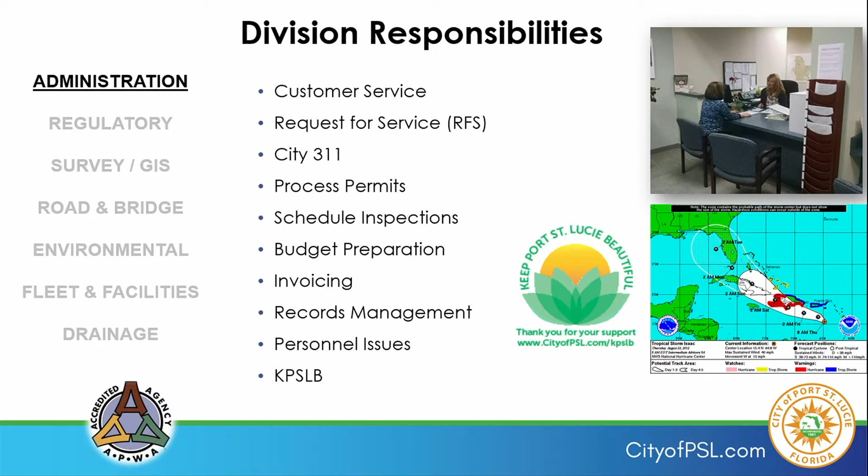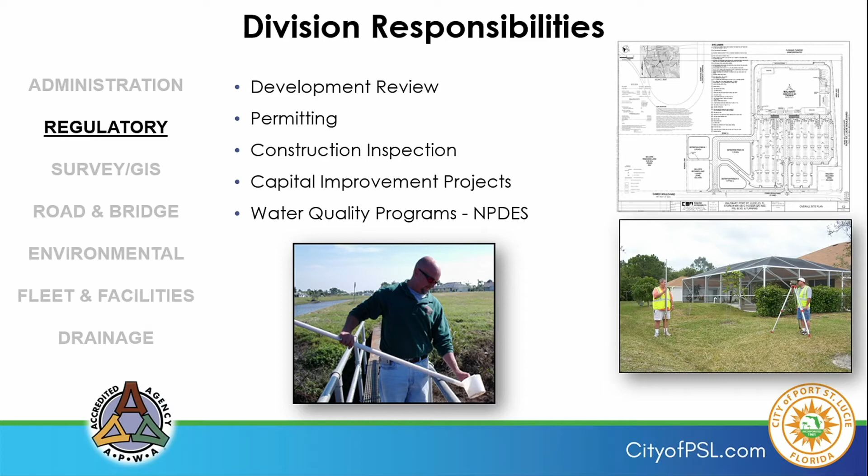The regulatory division's responsibility is development review, permitting, construction inspection, capital improvement projects, and water quality programs. The survey GIS responsibilities are to maintain city official legal descriptions, maintain the city's drainage base map, maintain and densify vertical control datum, review subdivision plats, and create asset mapping systems.

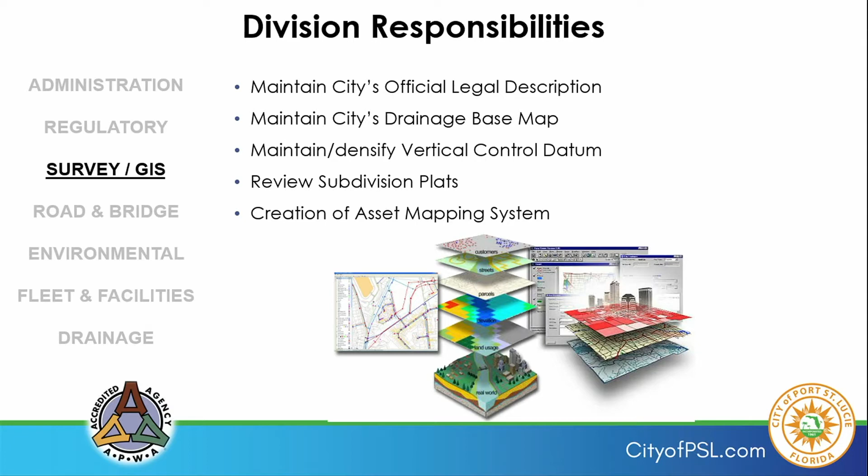The next division we'll speak about is the Road and Bridge Division. The Road and Bridge Division basically maintains and operates streets and bridges. They oversee the bridges and streets throughout the city. Plus they do traffic signals, street lighting, school zones and flashers, and the fiber optic network. Basically, that is our traffic operations, what they do on a daily basis.

Then we have our Streets Division. Basically, they do resurfacing, repaving, and pothole repair. I know a lot of y'all drive down the road and see potholes. You call it in at 871-5100 and put in a service request. We send the crew out and fix the pothole. Without us knowing there's a pothole there, we don't know to fix it. So if you see a pothole in the road, please report it.

Street sweeping - we run a street sweeping operation also. We have a street sweeper that runs four 10-hour days a week from Sunday to Thursday, and they run at night when everybody's asleep, basically from 9 o'clock at night till 6 o'clock in the morning, sweeping the roadways.

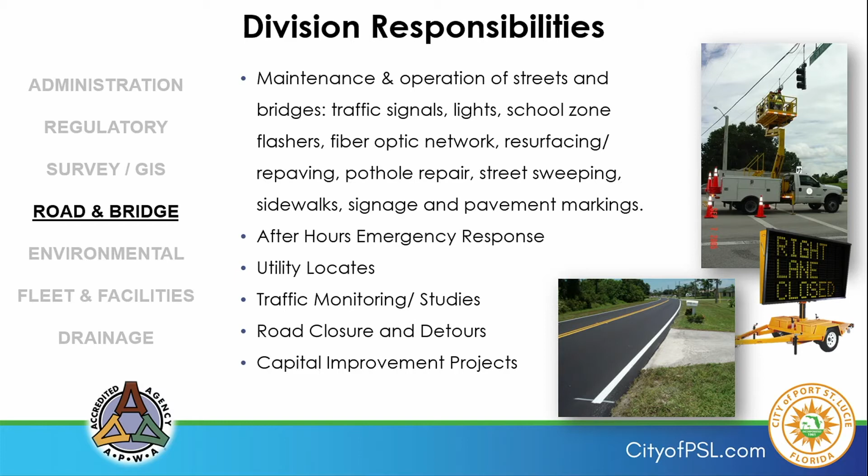Sidewalks - we put in sidewalks and do sidewalk repair, signage and pavement markings, and they also do after-hours emergency response. For example, if there's a spill in the road, this division would go out and clean it up. They also do utility locates, traffic monitoring and studies, and road closures and detours. If a road has to be closed, they do the paperwork. Plus they're also in charge of capital improvement projects within the department.

Our Environmental Division - I know y'all see a lot of them around. They do a lot of contractual work. We mow the Crosstown Parkway and pick up litter, but our environmental division does a lot of that. They're in charge of all the mowing throughout the city of Port St. Lucie, that's the green belts, right-of-ways, and medians. They do landscape trimming - you see the people in the medians trimming bushes, trimming trees, pulling weeds. They're in charge of fertilization and pest control also.

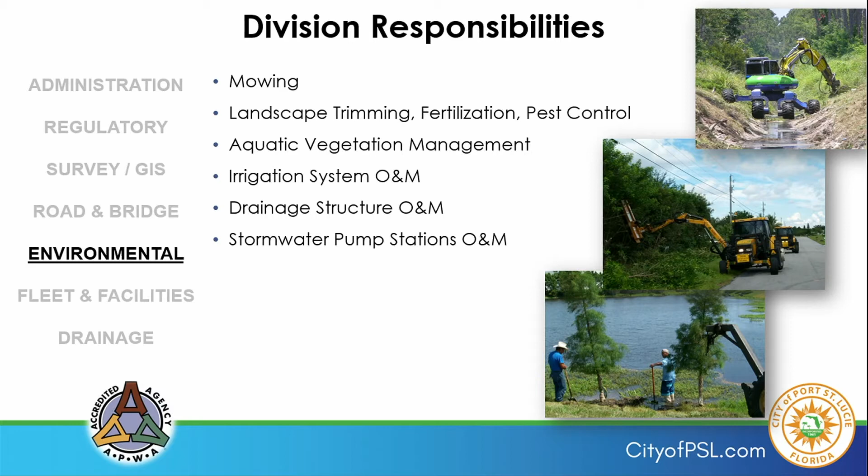Aquatic vegetation - they're responsible for spraying the canals and maintaining the vegetation in the canals. Irrigation systems - they oversee the irrigation systems throughout the city. They're in charge of drainage structures and stormwater pump stations. We have 2 stormwater pump stations east of town, which is Blackwell Pump Station and Tiffany Pump Station.

The next division is the Fleet and Facility Division. We have 150 vehicles within our fleet. I manage 6 facilities, which I spoke about before: the Dwyer Complex, Biltmore, Thornhill, the City Hall building B 2nd floor, Tiffany Pump Station, along with Blackwell Pump Station. I also oversee the warehouse inventory for our department.

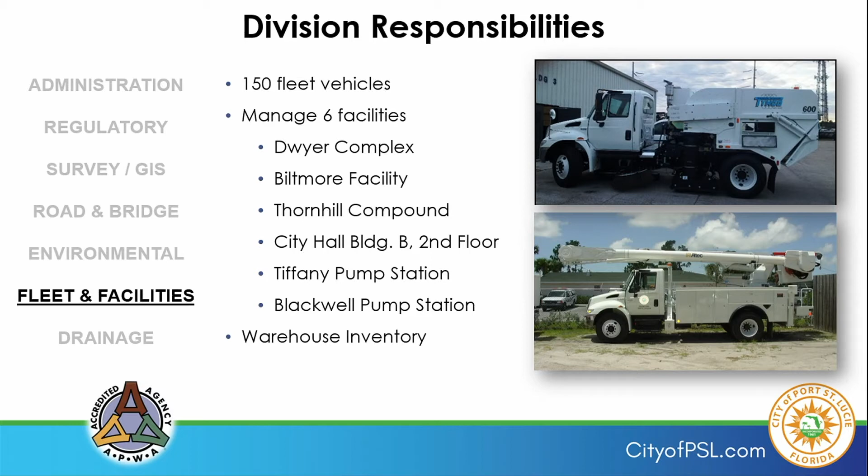Okay, this is where my specialty is - swale drainage. I oversee the drainage designs and putting together the survey crews that go out there and set the elevations for the swale liner. The swale liner is the plastic thing that's in your swale that helps with the drainage. It gets the water moving a little bit faster, trying to get it out of your front yard. And we also do the culvert clean out, repair, and replacement.

We do a lot of those all over the city. The city's actually old enough now that all these metal culvert pipes underneath the roads are starting to fail. So the more storms we get, the more use these pipes get, and these pipes are starting to fail pretty much all over the city. So we're trying to replace them with concrete pipe instead of these old metal pipes, because they rust out. It's a battle that we're continually working on, like daily.

They seem to keep getting worse and worse because the infrastructure is so old. We do the swale improvements. You've probably seen a lot of our trucks out there digging the swales. We get a lot of requests for services because swales hold water, and we've had a lot of rain, especially lately. We've had probably 20 inches of rain in the last 2 or 3 weeks. So the requests for services are coming in continuously. We're trying to keep up with it.

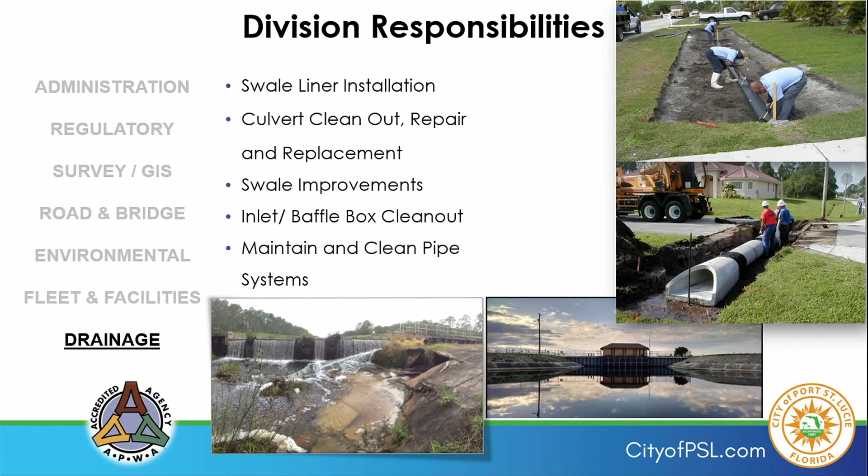That's a lot of money. That's $32 million that we use every year to maintain this city under our operating budget.

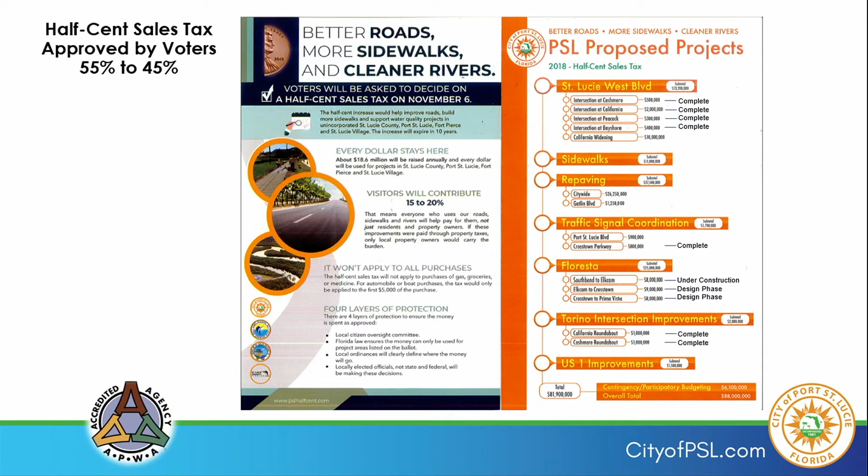I would just like to say that the Floresta project is the widening project. They're going to widen Floresta from Southbend Boulevard to Prima Vista in 3 different phases.

All right, go ahead, recent projects. If you've been up on Gatlin, down by the Home Depot near 95, you've seen construction on the south side. That's going to be a bus transfer station they're working on right now. It should be here in '21. They're putting in a bus transfer station and park and ride lot, right on the east side of Home Depot.

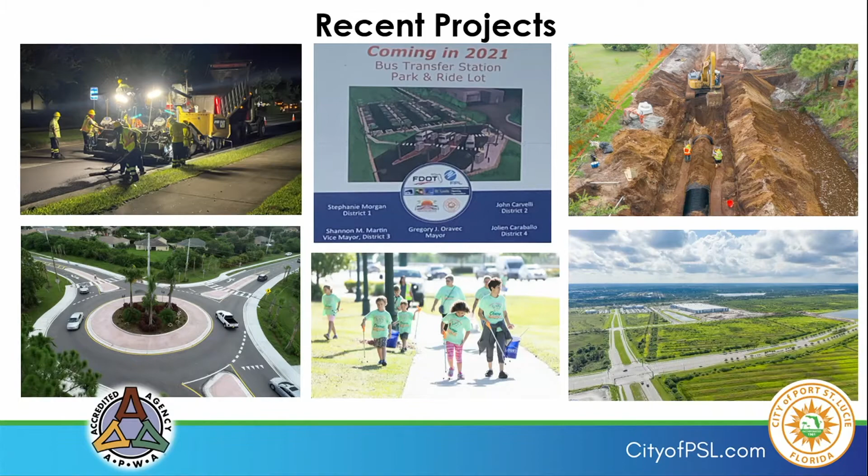What happened here? Okay, yeah, I'm sure you've all been down the Crosstown Parkway.

It's a beautiful road now, and the bridge itself is just awesome when you look over both sides. It also won some awards, as you can see. The American Association of State Highway and Transportation Officials awarded it most value-added proposal in the category of pre-construction engineering, 100 million or greater. The Florida Transportation Builders Association gave it a local agency program award in Florida's Best in Construction. The Engineering News Record Southeast Region named it best project in Highway and Bridge. And the Design Build Institute of America awarded it Project of the Year in Transportation Structures.

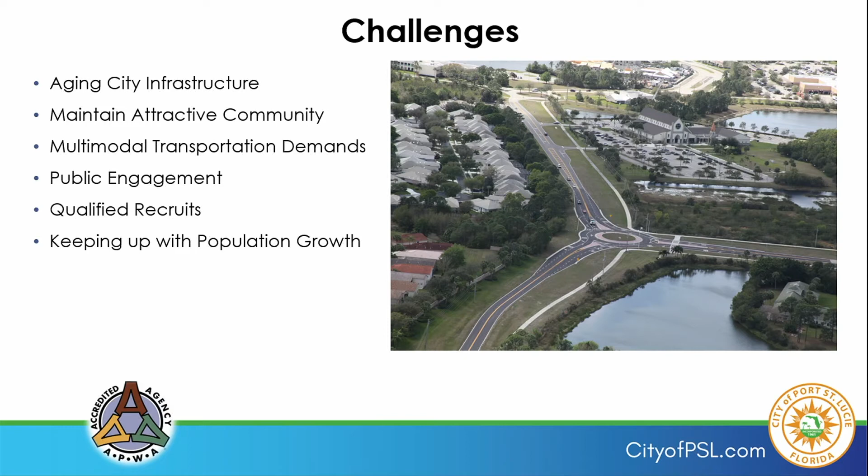Some of our challenges: we've got aging city infrastructure. Dan's been talking about infrastructure since we started. It is getting old and we have to maintain it, maintain attractive communities, multimodal transportation demands, public engagement, qualified recruits, and keeping up with the population growth.

I got one other thing I'd like to speak about real quick. Our department is really big into debris management. If there's a storm coming, our department are the debris managers for the city of Port St. Lucie. We have a total of 8 different debris sites throughout the city. Once a storm has been named and it comes in, we have to gear up to pick up debris, and basically our department is responsible for that. We're first responders for any kind of storm, so we'd be the first ones out there trying to pick up and move stuff around so that the fire trucks and Florida Power and Light, everybody else, can get around and try to do their jobs.

Well, at this time, that's all we have. Are there any questions? Of course. Thank you all so much.

One of the biggest things that comes across right off the bat in your presentation is the huge numbers of things that we maintain, not just because that's what Public Works does, but also because the city is so big and growing. So how do you guys plan for expansion? How much more do you think we're going to be adding, and how quickly is that coming on? Is that incorporated in the budget, and is it constantly growing?

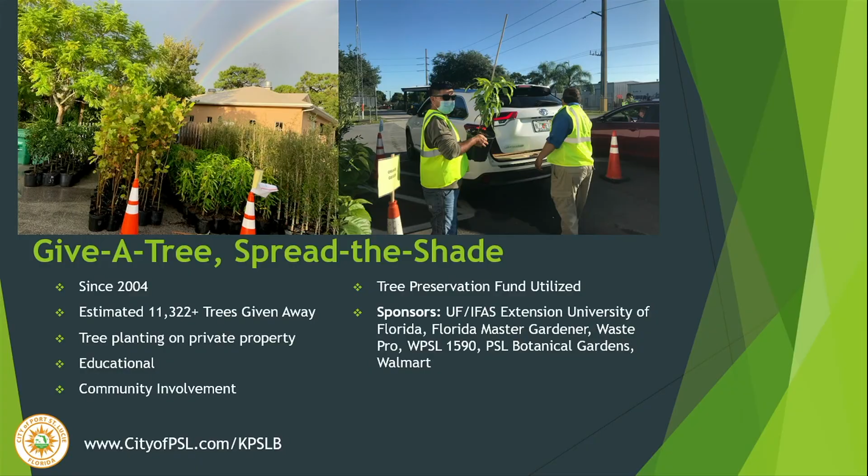And it worked out great, almost great. We had a rainstorm come in that day, so of the 450 trees reserved, about 350 got picked up. But good news, the rest were given away at our Household Hazardous Waste Collection Day event. People dropped off their chemicals and got to leave with a fresh tree to plant in their yard and support the environment. So that's great news.

One thing I forgot to mention: for the household hazardous waste, we partnered with utility systems because you remember how Jenny said you cannot put that bacon grease down the sink. So we said, all right, it's not hazardous, but it's harmful to the environment. So we allow residents to bring their cooking oil to the household hazardous event, and the landfill now has it set up where they collect that there as well. So you can bring your cooking oil.

Now, as part of trees, we help facilitate and work with all our city departments to track the data, and we encourage our residents to plant a tree. The mayor put a challenge out to residents about 2 years ago to plant a tree. If every resident planted just one, we'd have over 200,000 trees. Trees are great for our environment, great for us as human beings, great for the animals, and it's just a win-win.

Good oxygen, good air. So as of right now, since the inception, we have over 49,670 trees planted. You can go online anytime you plant a tree, go to the iPlant website, log in where your tree is, and it'll show up on the map.

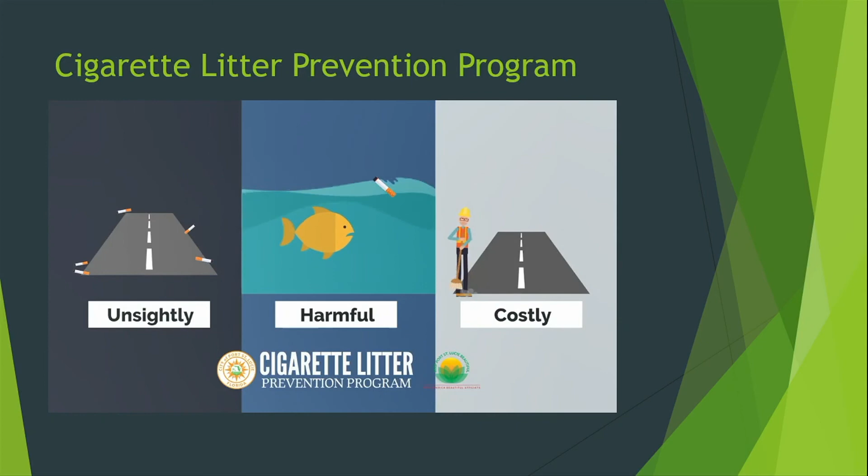Keep Port St. Lucie Beautiful invites you to join our efforts to prevent litter. Cigarette butts are the number one form of litter, and although small, they are deadly to our environment. Cigarettes are not biodegradable and can end up in our waterways. You can help by disposing of cigarette butts in proper receptacles. Contact Keep Port St. Lucie Beautiful to receive a free portable ashtray or litter stand while supplies last. Visit our website at www.cityofpsl.com/KPSLB for more information.

All right, so litter prevention awareness. As part of the LEAP, we talked about partnerships, and Parks and Rec invited us to develop a new partnership with them for their summer camp program.

It started last summer and continued this summer, and we work with the campers. Last year, they learned about what was in the landfill while talking about litter and recycling, all tied in one, and they created a little trash pizza, we called it. And this year, and last year, we invited the teenagers to participate in a litter prevention PSA contest.

Whoever won would work with our communications department, and they would be famous. They would have a video created, and the video would go on YouTube. And we had a winner, Caden Young, created a video, and I want you to hear it. It's really awesome. So here's that.

Don't throw trash on our earth, ask yourself what is it worth. Now here's why you should respect the nature, the only thing melting is our North glaciers. We should be on top like the Kansas City Chiefs, but instead we're on the bottom with the dying coral reefs. The water is warm and our earth is on fire, everything is gone, nearly haywire. What do we do? We do our part, keep PSL safe into heart. This is our town and we need to keep it clean because everyone knows that pollution is a fiend. Don't throw trash on our earth, ask yourself what is it worth.